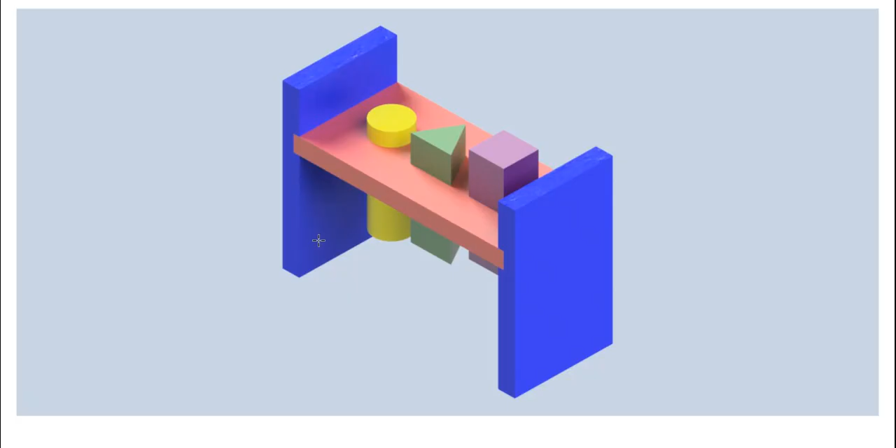I'm going to show you how to create an assembly for your pegboard in Autodesk Inventor. This is what the completed file looks like, and if you look at it from the front view, you can see that the 3 pegs are set so that they are slightly different to each other. If we have a look at the file, the 4th page shows you that they each have a distance of 10, 20 and 30.

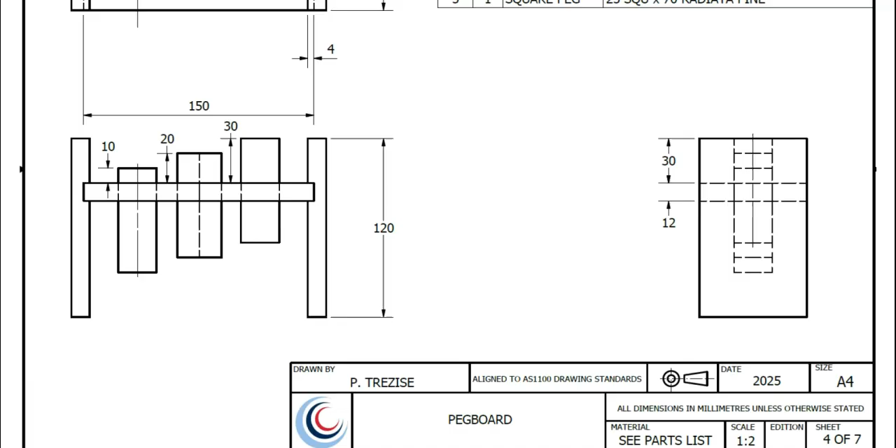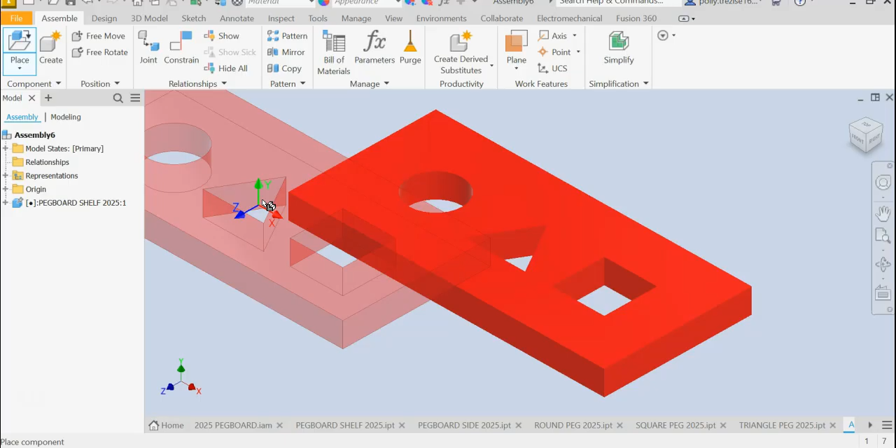To start the file, you need to select File, New, and we're going to do a standard millimeter assembly file, so double click on this one. Place the first component, navigate to the folder where you've stored all your files, and we'll start with the shelf. When you bring the shelf in, it will be in the right angle to start the file. 1 click will give you a preview, 2 clicks will open the file. So Inventor assumes you want another one, so right click and say OK, because we only want one file.

You'll note here in the browser that this first component that's been brought in has been grounded, which means it will stay fixed in place and the other components will move up to it. There are 2 ways of doing that. One way is to right click on the component once you've brought it in and just select grounded. But the better way to do it is to actually make a change in the settings.

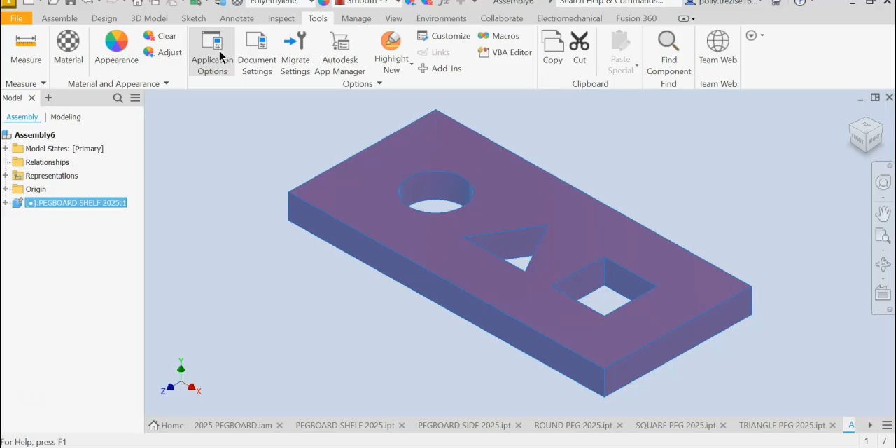So if you go into Tools, Application Options, select the Assembly tab along the top and check this box here so that it says Place and Ground First Component at the Origin. Click Apply and then Close. Now doing that once you've started an assembly will not change the current assembly, but it will change any future files. So what we'll do next is come back to the Assembly tab on the top ribbon, and we're going to place the next component, which will be the side.

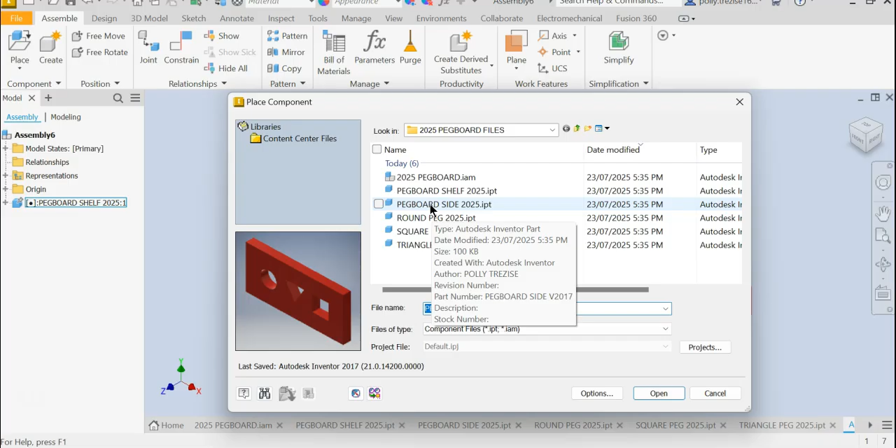Now when we bring the side in, it won't be aligned the way that we want it to. So we're going to rotate it before we place it. So if I open that file, what I want to do is I want to flip this piece of material on the Z axis. So if I right click, and then I'm going to rotate it along the Y axis to flip it and make it stand upright. So if I go it that way, there is our first component.

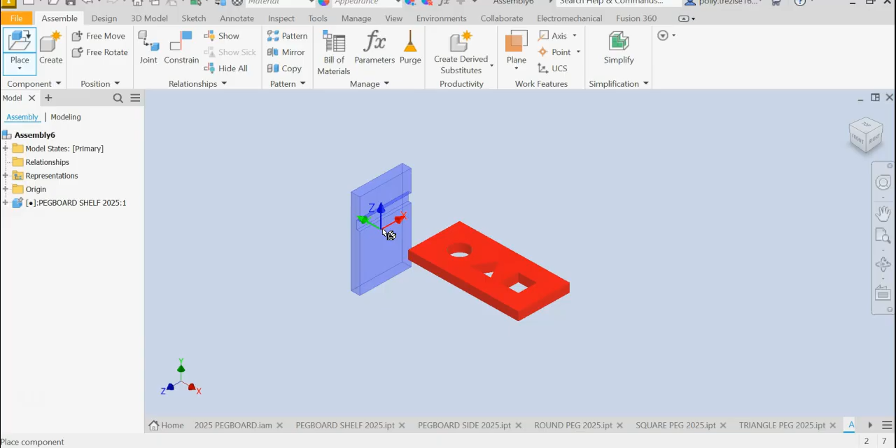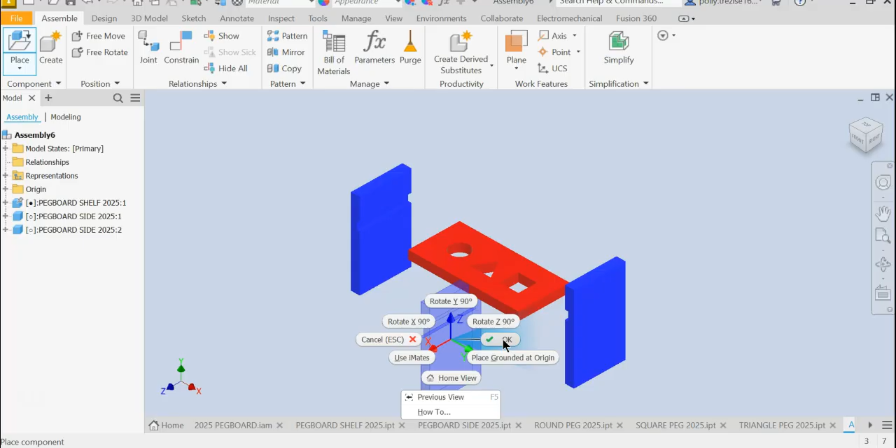Now I want to rotate around the Z axis again, so that's the vertical axis. So Z and one more time, and that brings that around so that it's placed in the right position to join them up. You don't have to do that. I'm a visual learner. I like to see these parts in the correct location, so it's up to you as to what works best. So OK to cancel, and we're ready to join these together.

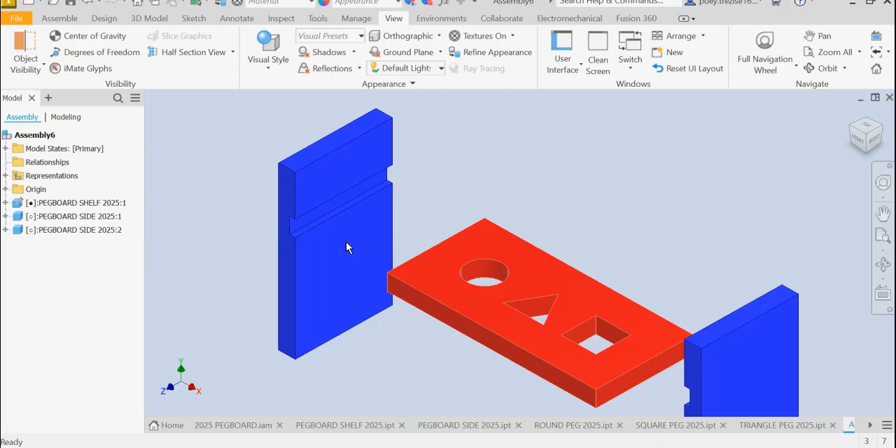I find that sometimes coming in and changing the way that we view this by going View, Visual Style and selecting Shaded with Edges makes it a little bit easier to see where the components are, especially when we've coloured them. So we're now going back to the Assemble tab, and we're going to use the Constrain menu. There are 2 options that we're working with at the moment, and we're going to use the Mate and the Flush constraint. So either of these will work for specific purposes. So we're going to start with the Mate constraint.

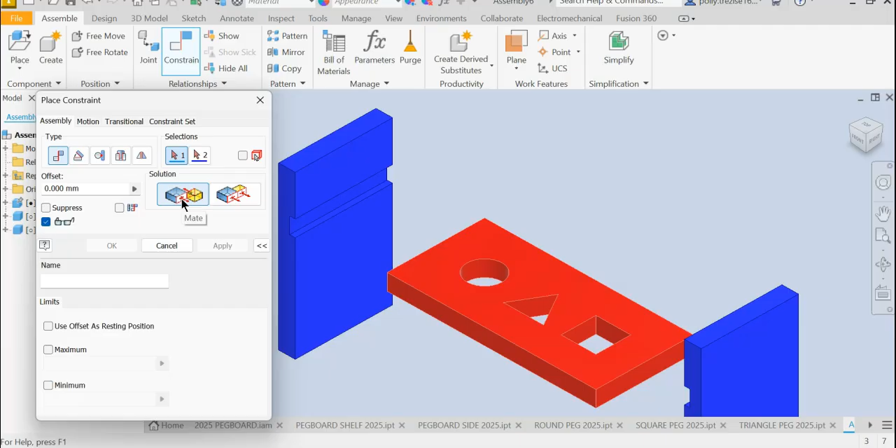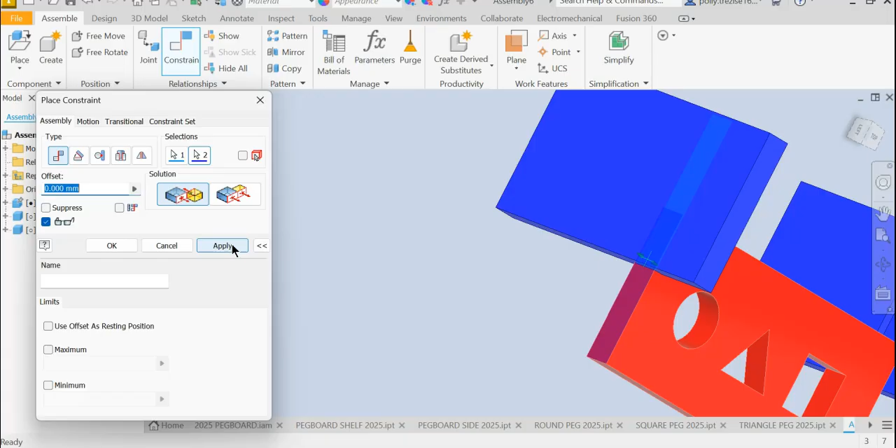So I'm going to come in and select that surface on the inside of that trench. And then I will press my Shift button and my Center mouse button and rotate the file around so that I can select the end of the shelf. To complete each constraint, you must click on the Apply button. Now whatever I click on next, I will begin the next constraint. So sometimes I like to cancel out, reposition my views, and then come back into the constrain option. You don't have to do that, but sometimes it makes it easier.

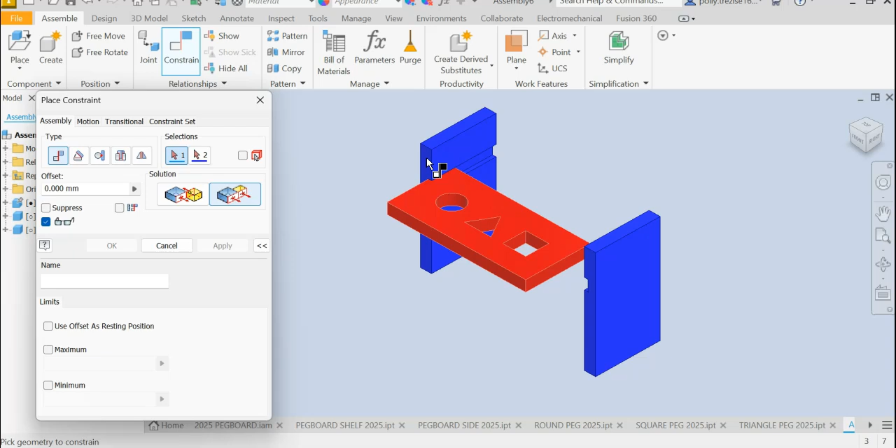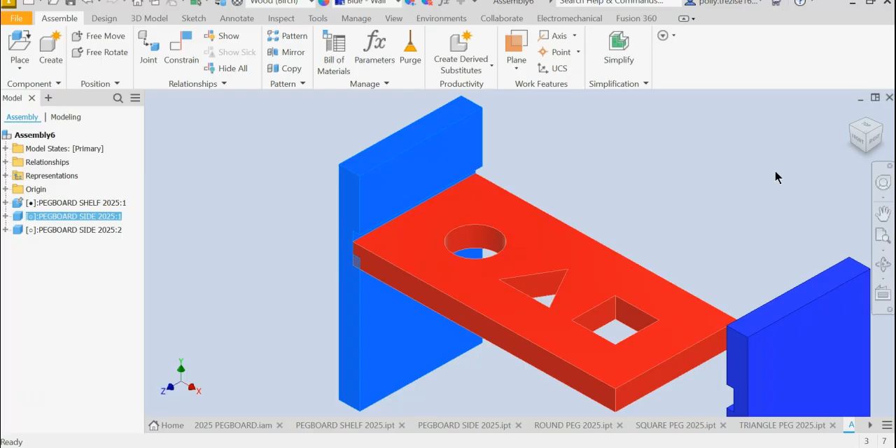I'm now just going to flush these 2 components. I'm going to flush that surface and the front surface of the shelf. Now notice that the side was the one that was moving, because remember this one is grounded. Must say apply. Alright, now if I move this, I can only drag it up and down. So we have flushed the front surfaces, we have mated the inside of that housing joint, so I cannot drag that piece away.

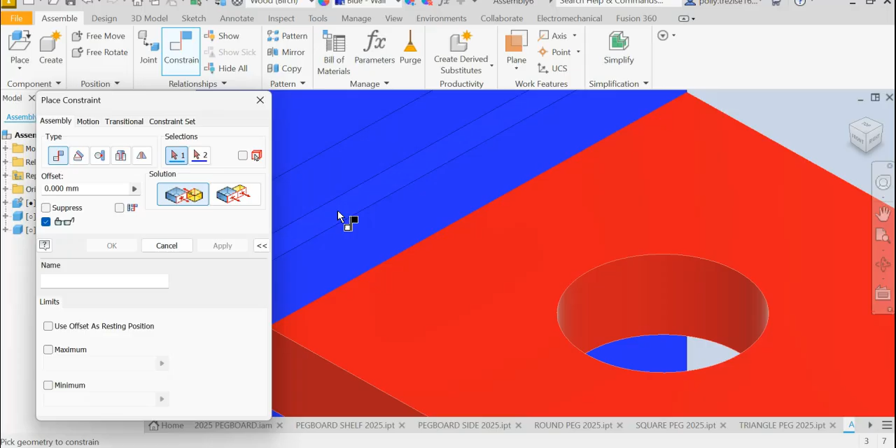So I'm going to reposition this part before I start constraining, so that I can access the inside of the trench. I'll come back into the constrain and select mate on that surface, then rotate the model around again to select the underside of the shelf. Press apply, put that back, close that one.

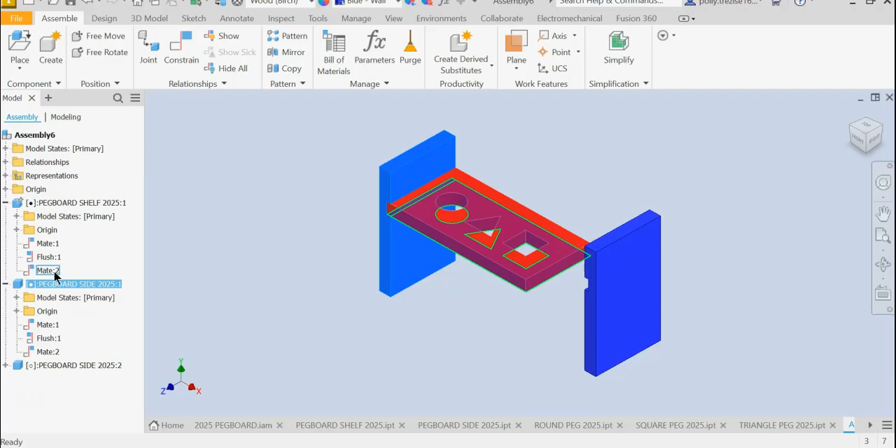Now I cannot move that part around. It's fixed and fully constrained. If I want to check the constraining, I can open or expand both of these parts. So there are three constraints: the inside mate, the flush on the front surfaces, and the mate constraint on the bottom of that trench edge.

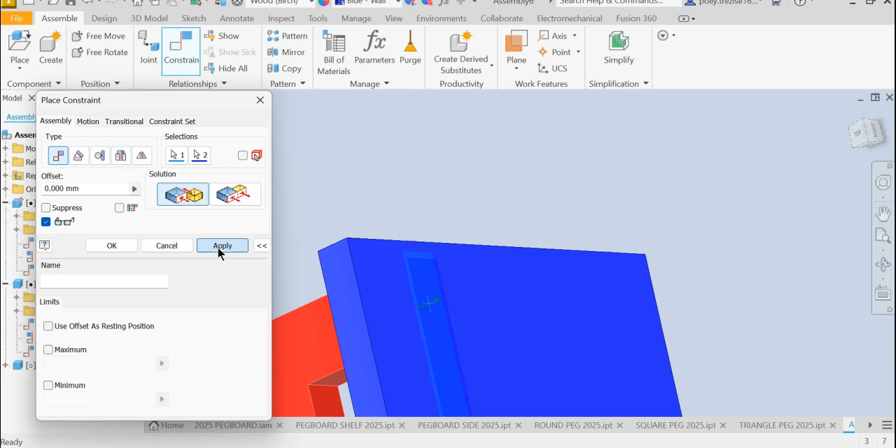So if I rotate this model around, we can do the same thing on this back part on this other side. So constrain, mate, rotate, mate, apply. Reset the view. I'm going to flush the front and apply. Doesn't matter which order I do that in.

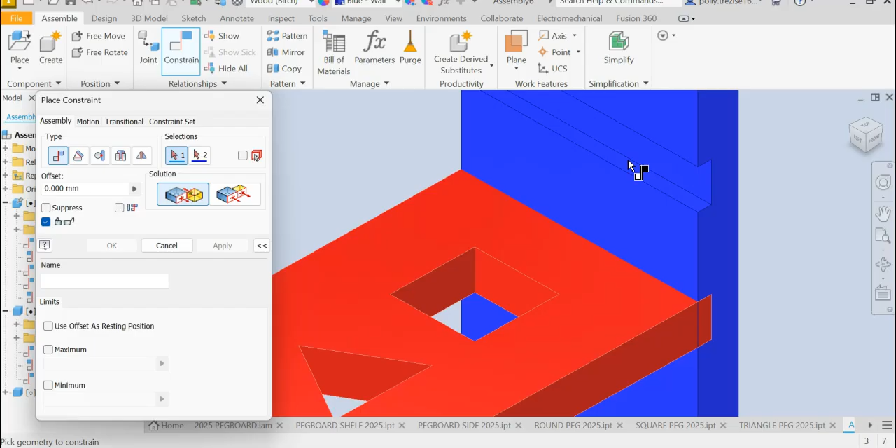Again, I'm going to rotate it and move this so I can view back into constraint, and mate that edge and the underside of that shelf. Apply, close. Alright, so just to double check, nothing can be moved, and those three components are ready to go.

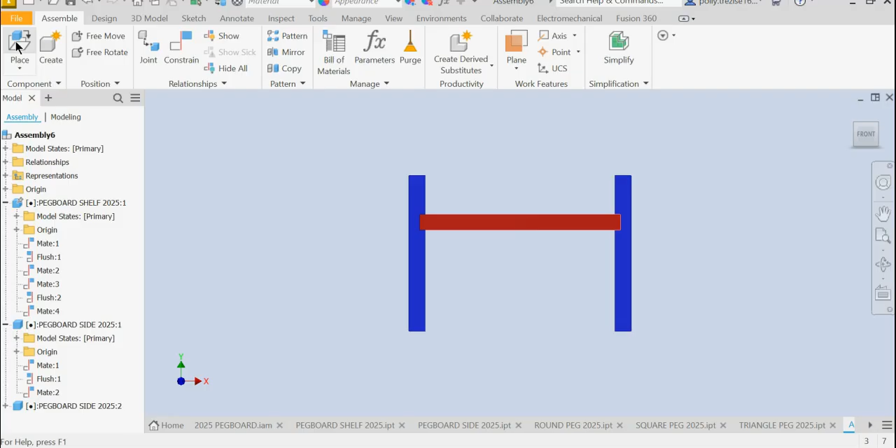So I'm now going to bring in the little pins. Again, place. I can bring them all in at once if I like, so I'll select all three of them, and then I'll have to rotate them individually if necessary. So I'll pop those ones there, right click OK, and I can move the component around so that I can see them.

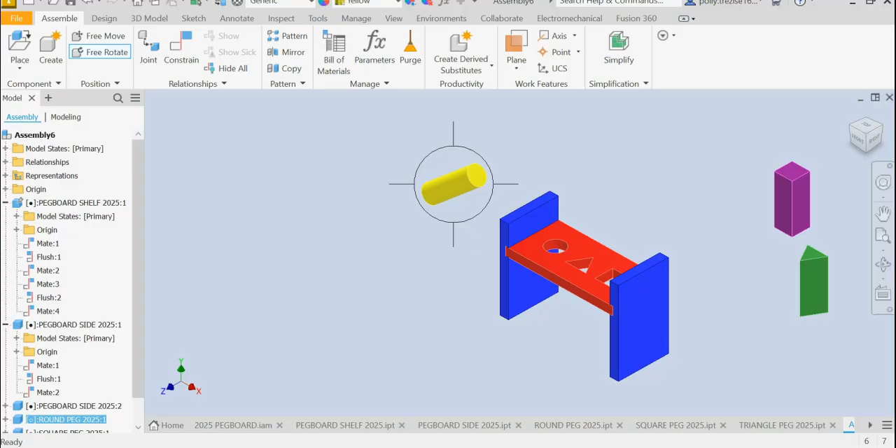If you wish to rotate the part around so that it's aligned approximately in the right spot, you can change it by doing the free rotate. Right click OK. Alright, so to assemble this little pin into the round hole, we are going to use the axis of the part and the axis of the hole.

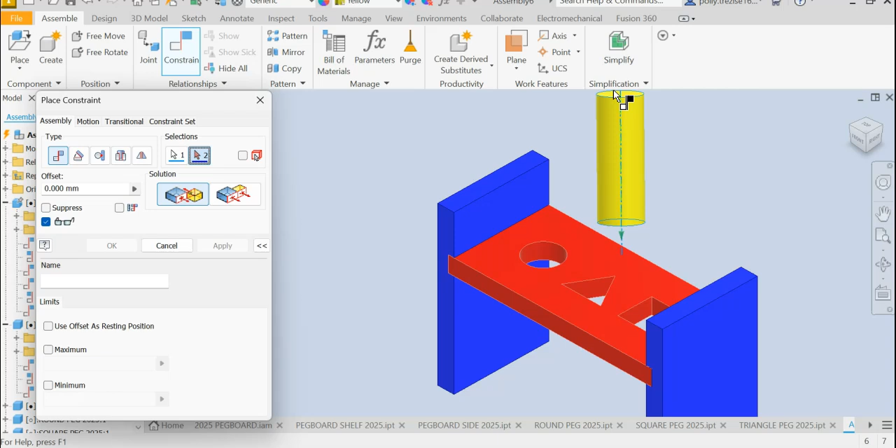We are going to mate the central axis, so if I click on that, it picks up the center axis, and I'll click on that curved inside part of the circle, then apply. We'll check that that's worked. I cannot drag that left and right, but I can move it up and down.

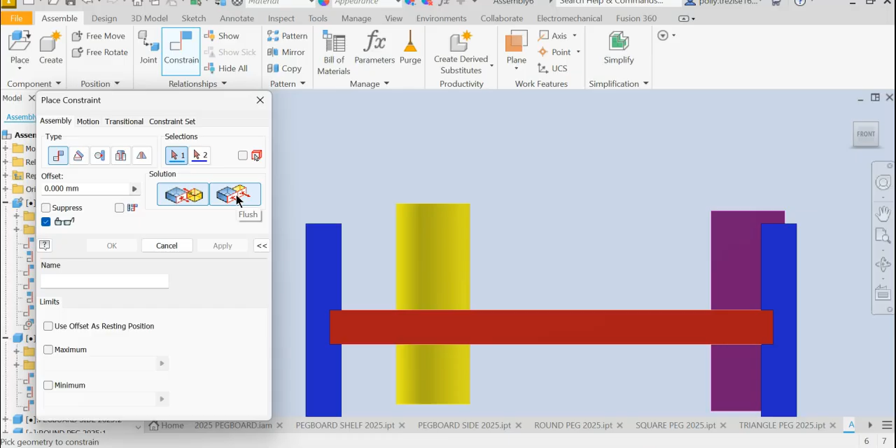So to finish off this one, remember this one is 10 millimeters. What I'm going to do is a flush constraint from the top of the peg to the top of the shelf, which sets it at 0 over here. And so we're going to change the offset.

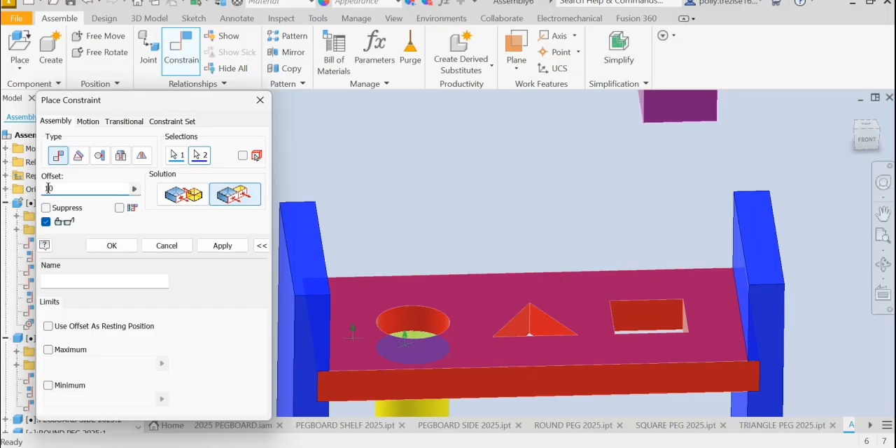If I type in 10, the pin will actually move in a negative direction. So watch what happens. I've typed 10 and it's moved downwards. So all I'm going to do is put a negative to change the direction. Click apply, cancel that, and you can see that that little pin is set now in there.

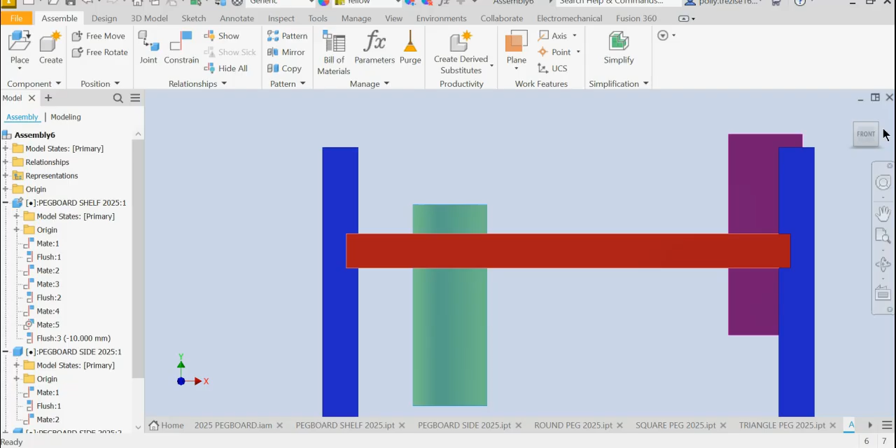Now I cannot move that peg, and this is one of the things I will do when I assess your work. I'll open up your assembly and make sure that everything is fully constrained. Alright, so let's reset this. I'll do the square one next.

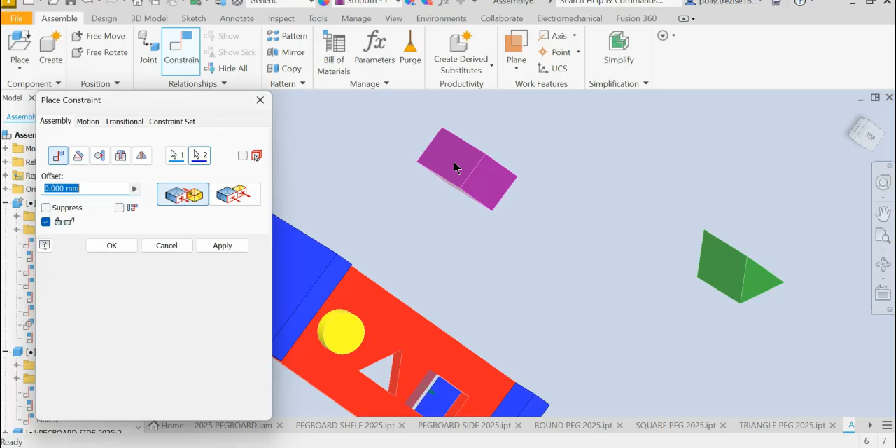So I'll bring the square peg in closer. Constrain, we'll use the mate constraint. I'm going to select that flat surface, then rotate that around to select the corresponding surface. Apply. I'll select this surface and come in to select, I can just catch that one, then apply. Let's check if that worked. Nope, it did not. Alright, let's have a look at that.

Alright, so that's the square peg. Let's have a look at what I've done. I did a mate constraint, and then I picked up the edge by mistake, so I'm going to delete that one. By expanding this part, I can see the constraints, so I'm just going to delete that one.

Let's bring that around. We'll free rotate it again to make it correct, and I will just confirm. So that edge is the one that's there. If I wanted to, I could delete that and start again, but that's the one I want to use.

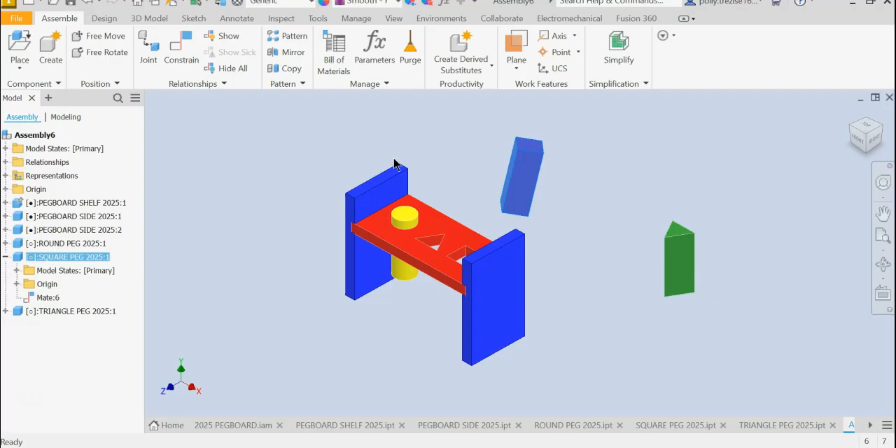So in this case, I'm going to mate that surface there with this one. I think I've selected the correct one, let's have a look. Alright, that's right. So that can slide in and out of the square hole, and then again we will flush it, and this one's 30 from the top, so I will go flush.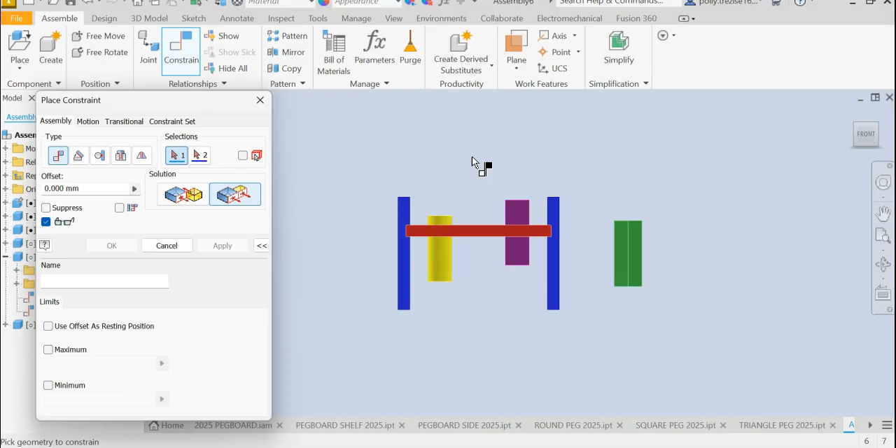Let's try mate, let's see if the mate one will work on this one. If I select the top one and select the top of the shelf and go apply, we'll get this. Alright, so let's use the flush constraint, which is the correct one.

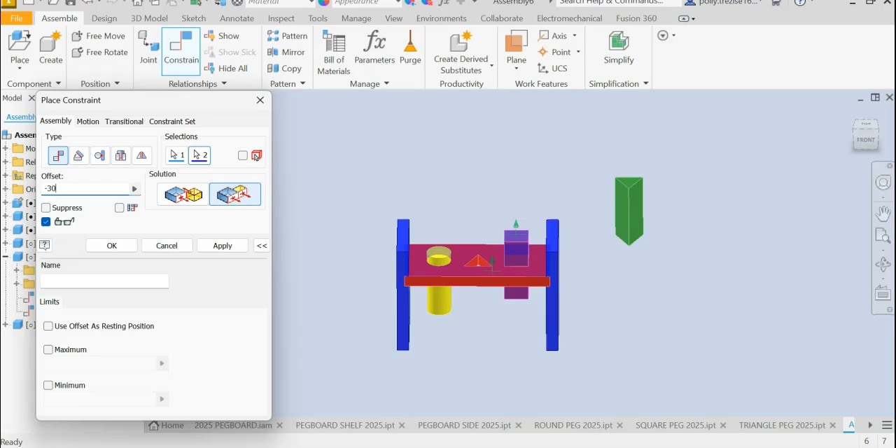So flush the top to the top of the shelf. We'll put our minus 30, and then apply. And we can check to make sure, and that part is definitely working.

Now when we do this triangle, if we have a look at it from the top, you can see the triangles like this. So I would always like to just rotate that part around.

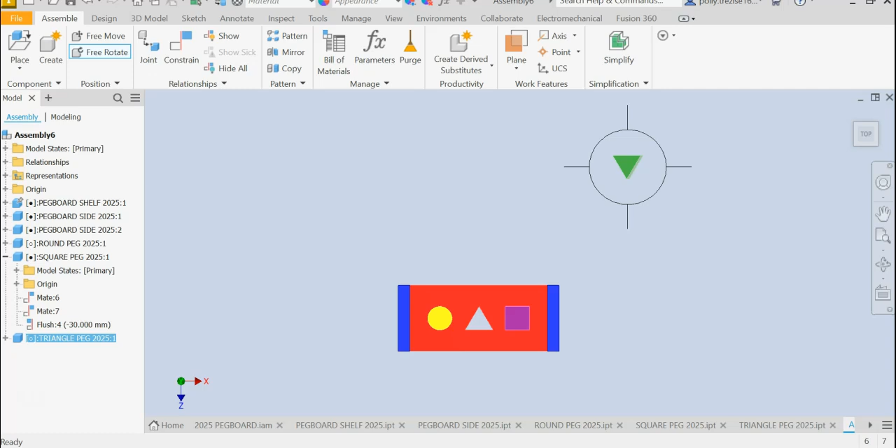Which one am I going to select? Is it this one? Hold on, how am I going to do that? I'm going to rotate it that way. That's what I want to do, like that. You don't have to do the rotation, I just prefer to do it.

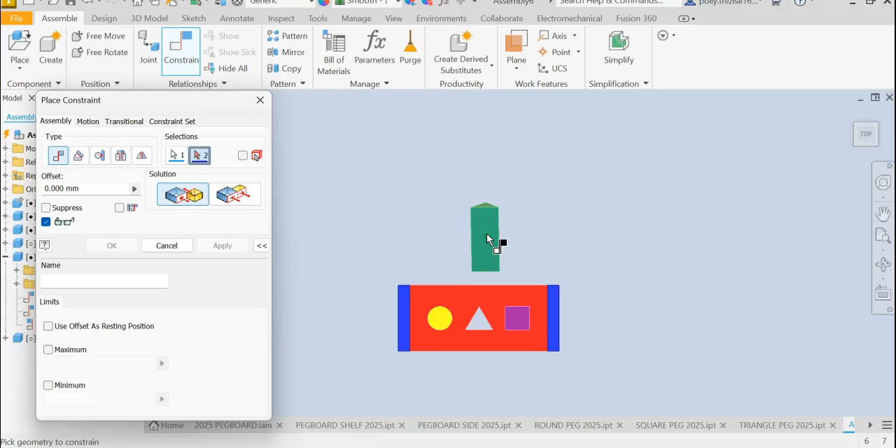Alright, so we are going to mate this flat surface with, rotate the model around, we're going to rotate it to click on that one, apply. Let's come back and have a little look at it.

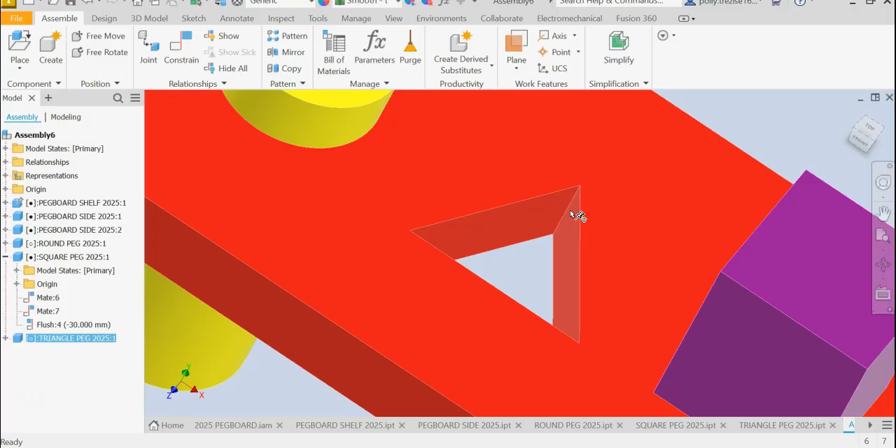Alright, now what I want to do on this one is get it in a position where I can see it a bit nicer. I want to select this edge, where that corner of the two triangles meet. I'm going to select that edge, and then select the edge of this triangle here.

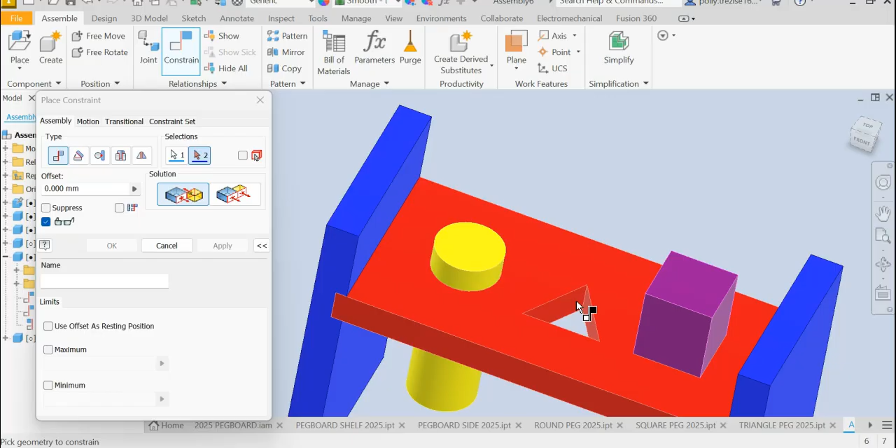So we're going to mate those together. This edge, not a surface, rotate it around, come on in so that we can see what's happening, and I'm going to select that edge there, make sure it's definitely got the edge, and go apply, check that, and oops, close the cancel.

Sorry. Now check to see if I can move that. Yes, I can move it in and out of the triangular hole, but I cannot drag it out completely.

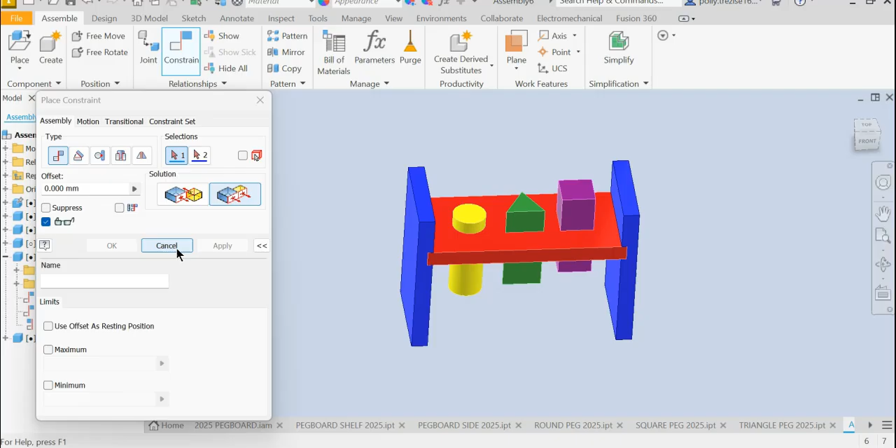So last of all, we're going to flush the top of the triangle with the top of the shelf. This time we're going to make it minus 20, and enter does the same thing as apply.

Oh, here we go, one last check. Cannot move any of the parts. Everything is fully locked. Check in the isometric view, and that's what it looks like.

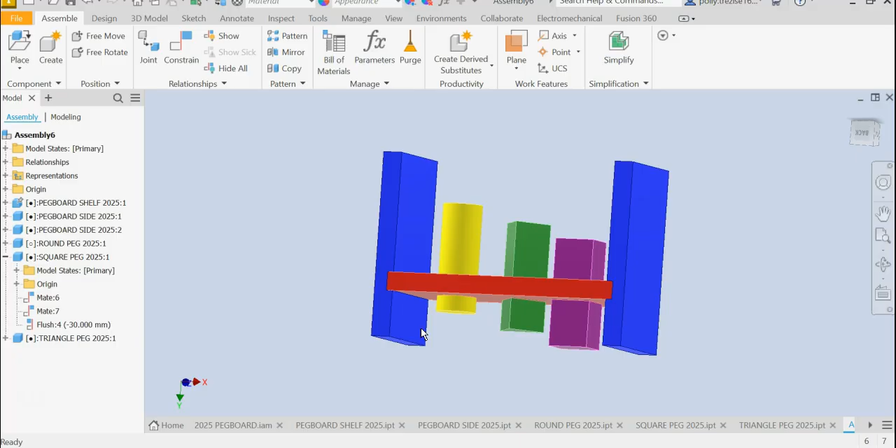One thing I will show you before I finish is if the model is looking in a different angle, let's say it's upside down, you can manipulate the view cube so that you can turn your model around, look at it from the correct angle.

So you can see I've got the circle on the wrong side, so I'm going to rotate that around, and that's the view I want it to be. Now every time I move now and come back to hit the reset or the little house button, it will go back to my upside down view.

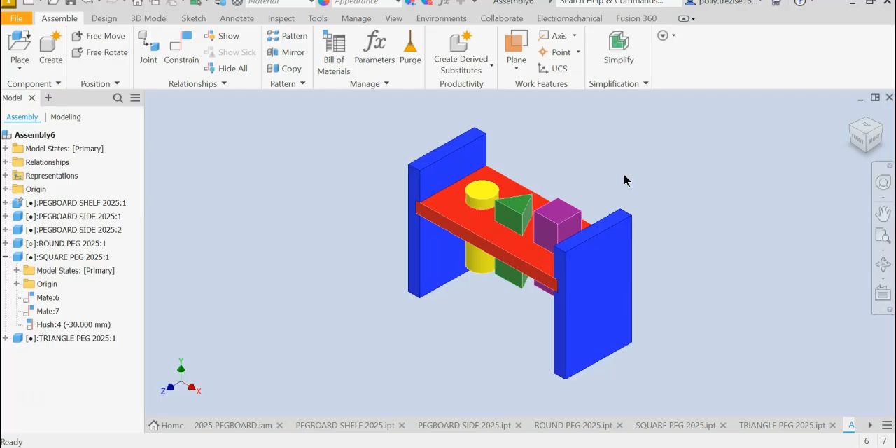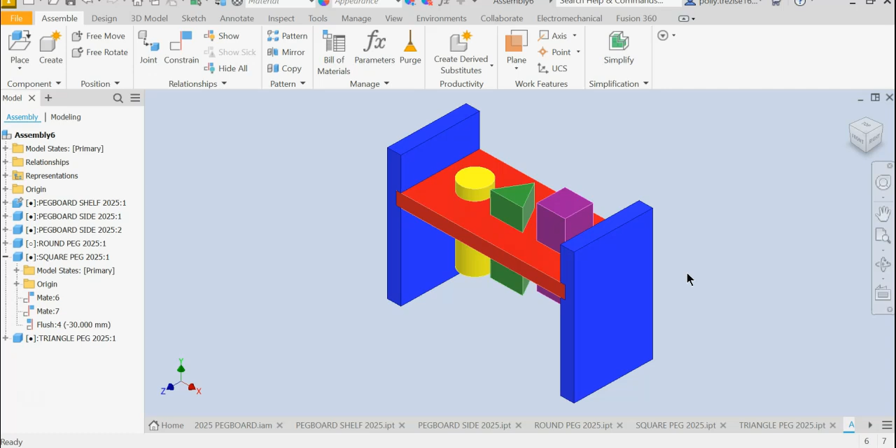So once I've placed the view at the angle that I wish to view it, you can come in here and go right click, set current view as home, and I would go fit to view. That way every time I rotate, if I just come back and click on the house, it will always return to what I want my home view to be. And that's how you create your pegboard assembly.